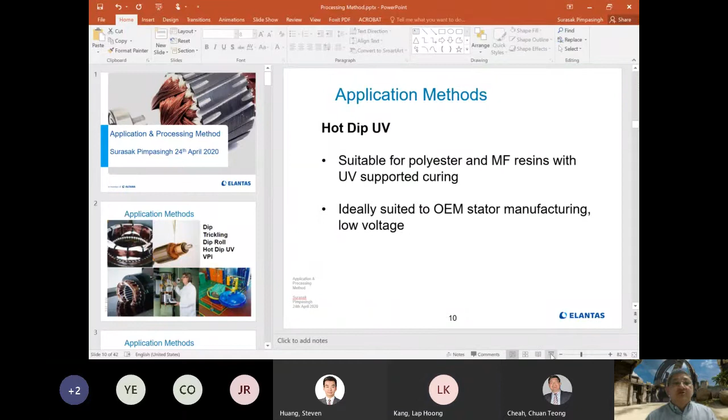Not talking right now, would you mind muting your speaker, please? Okay.

So to have the, looks like Koji cannot connect. Someone may help him, please.

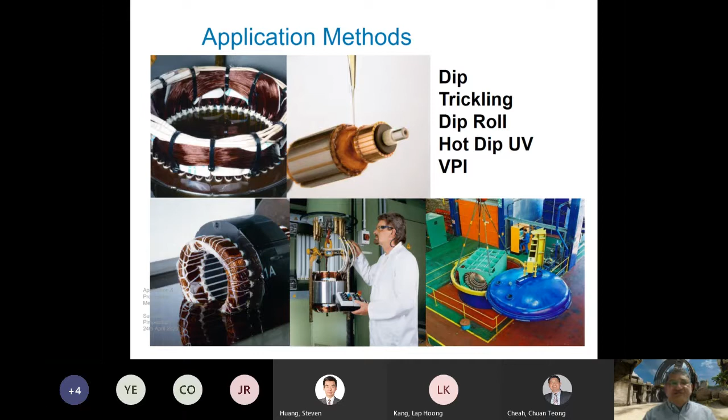The application method of the EL, we can see there are two things that we can separate. One is using the ambient pressure, and the other one is using the vacuum or the pressure. So at first, I would like to talk about the dip and bake, and this is for the transformer and motor. So both.

It is suitable for one component, and sometimes we also see two component as well. For example, CT, you may have a lot of experience on this, most of the unsaturated polyester is non-catalyzed. So we will have to catalyze before putting it in the system. So it's used for both one component and two component. So it suits the repair market and the OEM, as we always see.

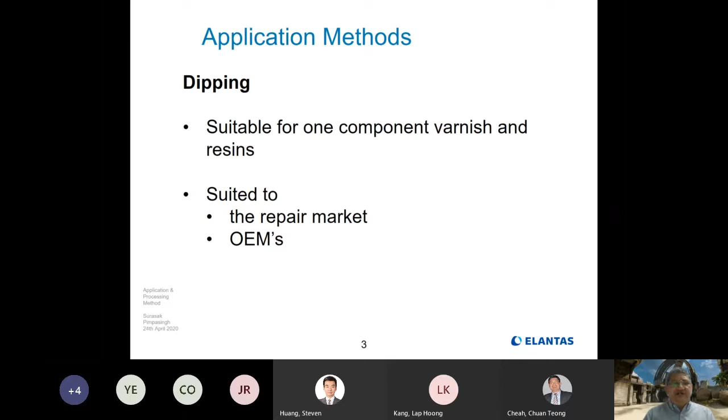So the most important thing when we talk about the dip and bake is the atmospheric pressure. We do not do anything pressurized or vacuum. Otherwise, we would call it something else. So this is what we call dip and bake. The resin is also under ambient temperature and ambient pressure.

The other thing, I think you always see the dip and bake a lot when you go to your customer. For example, for the electric motor repair or the OEM, you can see it a lot. You see the tank filled with resin, and then dip it, or we have something like what we call the inline process, and so on and so forth.

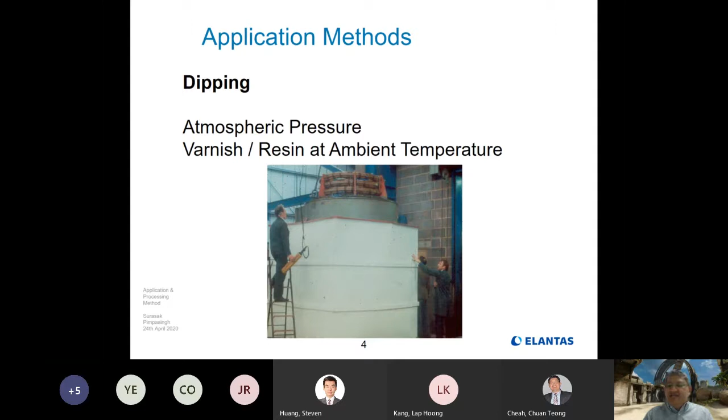So it is very important that you can imagine and follow what I'm talking about. This is more like an explanation and a workshop. So whenever you have a question, please do not hesitate to speak it out. As I always say, the most stupid question is the question that you have and do not speak out. So just ask and I'll answer. If I cannot answer, I will find the answer for you.

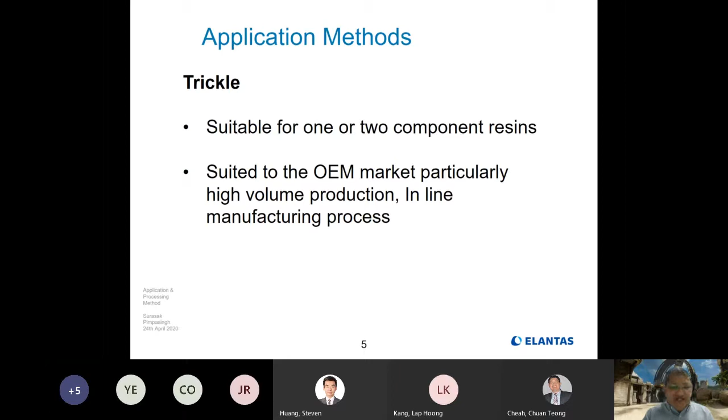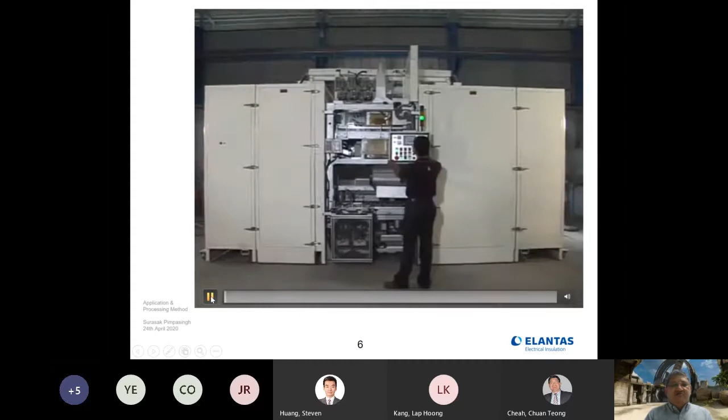So I have a short video that you can see. This is the method of trickle impregnation. Let me know if you cannot see or hear it. First things first, we put what we call a marker, and then pre-weigh first. Weigh before.

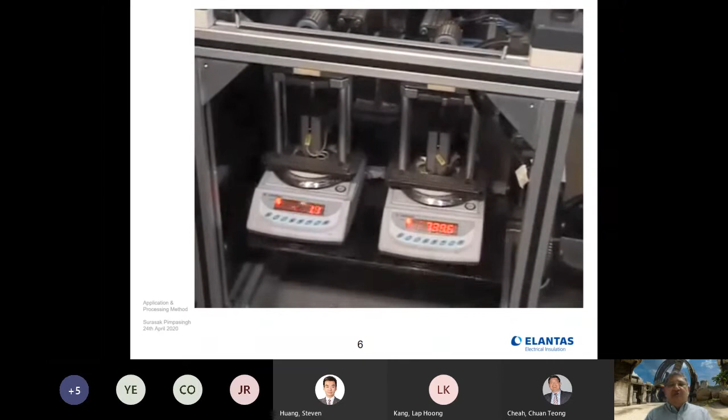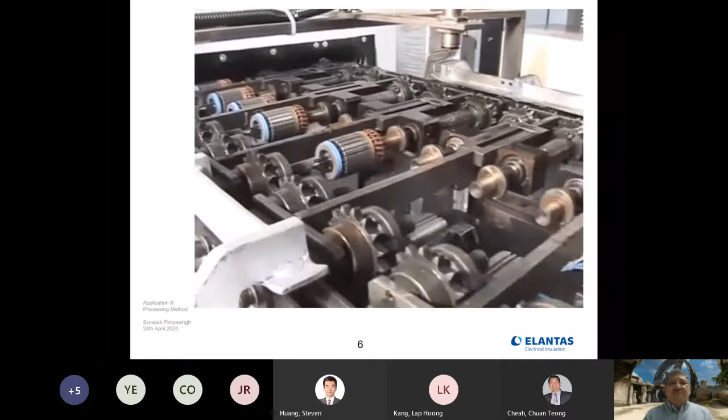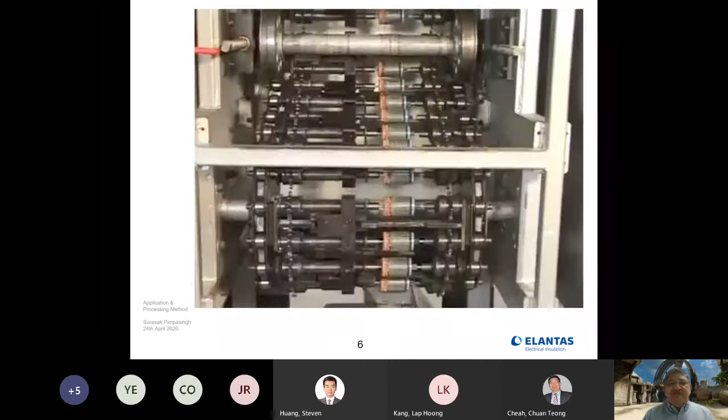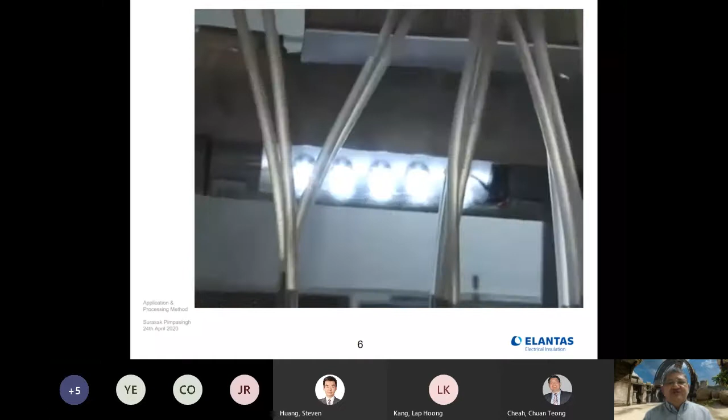This slide system, and then to preheat. After the video, I will tell you why we have to preheat. Some of you know already why. So this is the pump that pumps the resin at the amount that they want.

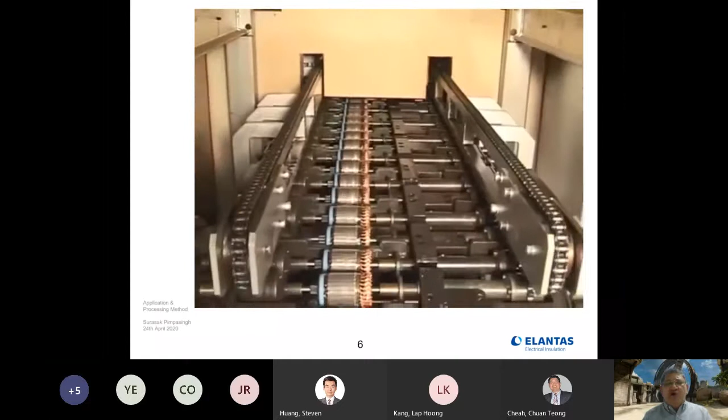This is the trickle zone, and after the trickle zone, it's sent to the scaling point. And after that, they will cool down. They will take it off and then measure the weight once again. So this gives you some idea of what we call a trickle impregnation system.

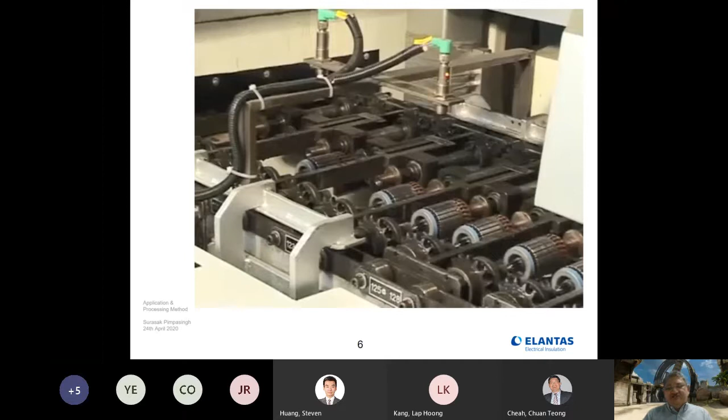This is the armature of the motor starter. It might not be familiar to you because they are using big wires and so on, because this has to generate high torque at the beginning. So it is the motor starter. This is something that we always see, and we have seen it a lot.

This is the power tools. So we trickle the resin. Usually we will trickle it at the ambient temperature. Only in some very cold areas will we elevate the temperature of the resin, because the more we elevate the temperature of the resin, the shorter the pot life.

I say pot life, not shelf life, because most of these things will be two-part, and when you put two parts together, the pot life is the point where the viscosity gets up to double. So if someone can remember the Dobeckan 1080, 120 A and B, the viscosity will be around 150 centipoise.

Not more than that. So whenever the viscosity gets up to 280 to 300 centipoise, that's the point we call the pot life. That's the time that you should not use the resin anymore, because it has already started to have the free radical or cross-link.

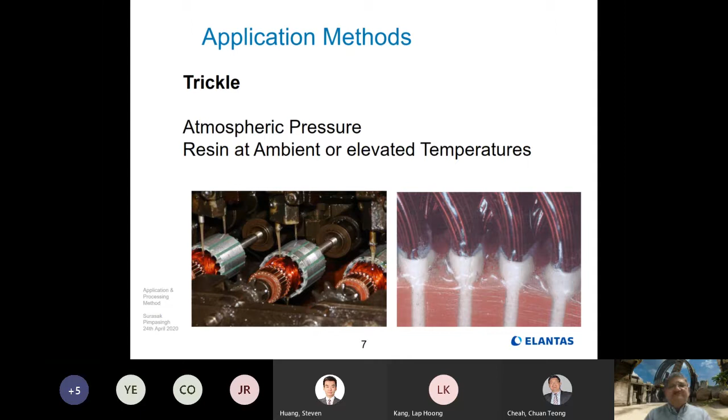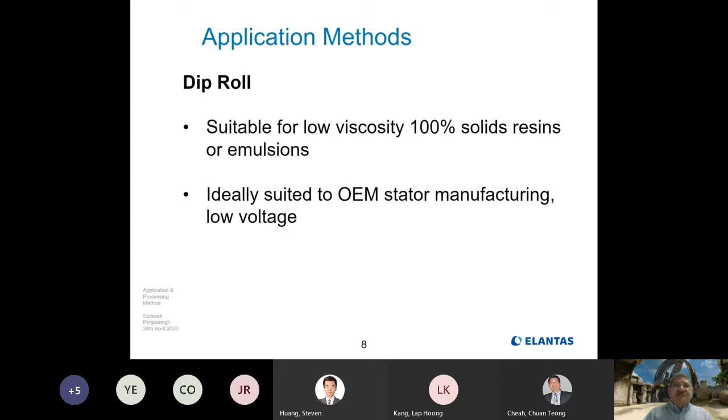So the other one that is used a lot in stator manufacturing or rotor manufacturing will be the dip roll. We have seen this a lot. Our very easy example is Mirari Motori. So HH 11,000, this is a very good sample of the dip roll. So it is very important for you guys to understand that.

So the dip roll can be at ambient temperature or elevated, or preheat the thing. This thing, the white one that you see, is the emulsion. It's a 59 series emulsion. So this is also part of the dip roll. The other things,

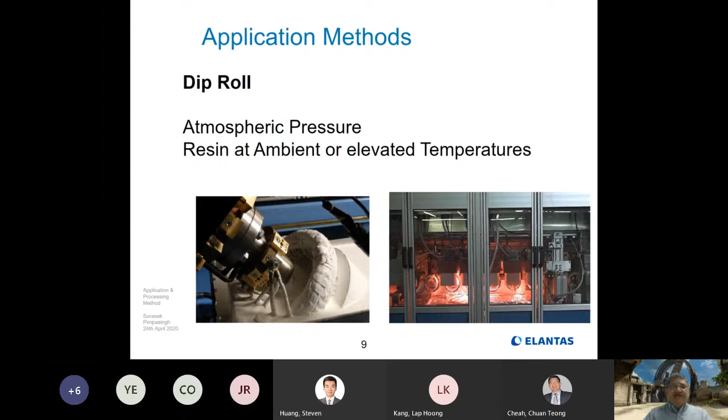the other method that we have not seen that much in this area, because the monomer-free resin has very high viscosity. Jinda and I went to Solar Palau in Thailand, and they spec the monomer-free resin in Spain, and they want to move the production line here. So it is the hot dip. When you say hot dip, it means it's really hot. So they preheat the part to 160 degrees and then put it in the MF resin, monomer-free resin.

You cannot do this to our normal unsaturated polyester or the epoxy, because the heat in your part will transfer to your resin, and it will shorten the shelf life a lot. But this will not happen in the monomer-free resin. So Solar Palau is a very good example of this. So this is a very important thing to understand.

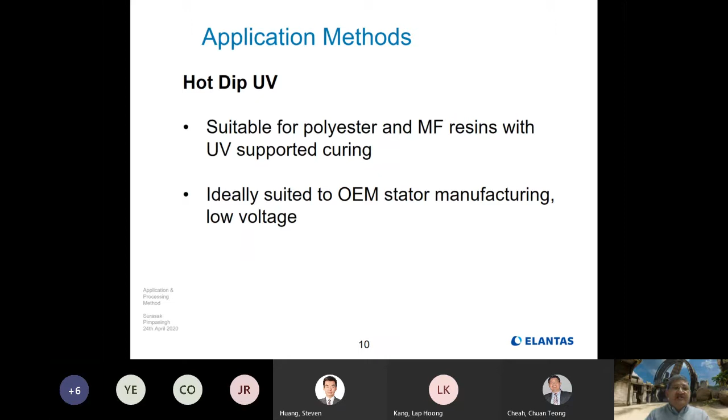So like this, we have the hot dip and then UV. The UV will help to cure and close the surface, and then after that we will fully cure, just like someone using step curing. For example, we have seen motor or transformer processes with our epoxy, and they want to gel it first. So they put it in at 120 or 130 degrees Celsius for 2-3 hours so that it gels first, and then after that cure at the temperature that we want. That's the two-step curing.

Very similar technique to the UV. So you want to close the surface first. This can be good only for solventless resin, because if you apply UV to solvent resin, it will close the surface, and then after that when you cure, the cross-linking mechanism of the solvent varnish is that the solvent evaporates, and then the crosslink happens. Think about it: if your surface is already closed and the solvent tries to get out, what you will see is a lot of blisters and a lot of bubbles.

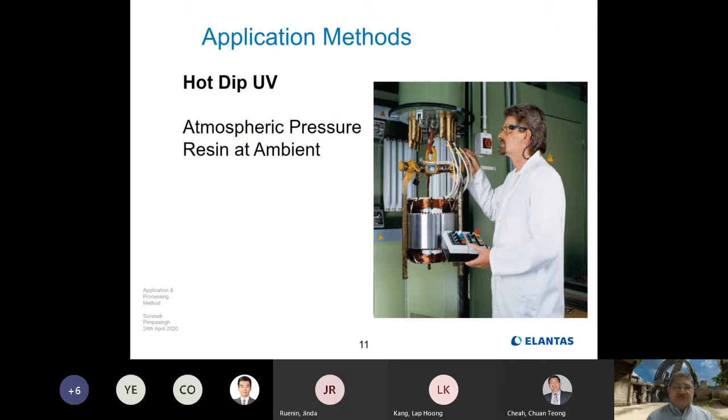Anyone with more questions about this, please speak up, because if not, I will go to the VPI, or vacuum pressure impregnation system. There's a lot of things to cover in that. At the end of the presentation, you can also ask questions once again. Okay, looks like no. Okay, I'll go.

The vacuum pressure impregnation system, or vacuum impregnation system, is suitable for high or low viscosity, but the most important thing is 100% solid resin, what we call solventless resin, unsaturated polyester without solvent. Monomer is okay, and it is used in both manufacturing and repair of rotating electrical machines, high and low voltage, and also traction motor repair as well.

As you can see, Cheah and I and Faris worked together with Mr. Bong in Mentech to charge the tank with the 477, and Jinda and I worked together to charge the tank with the 477 resin in, I cannot remember, Daniel Lee in Rayong.

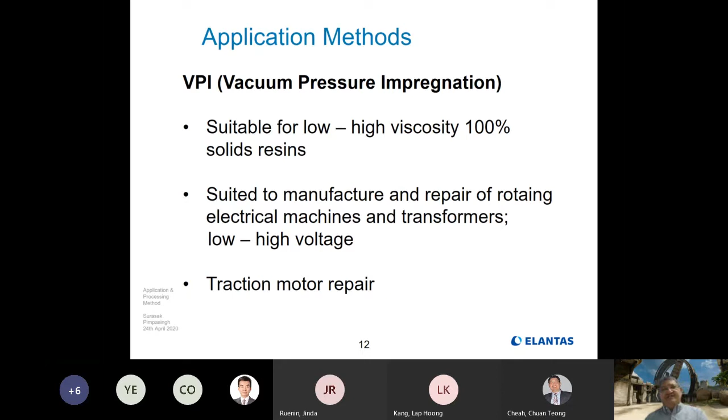So it is very important for everyone to understand the technique behind the VPI first. Then you can know why you have to have low viscosity, why you have to have thixotropy, why you have this property, and so on. So let me start with the vacuum and pressure impregnation system. I have a short video that shows why and how we have to use the VPI.

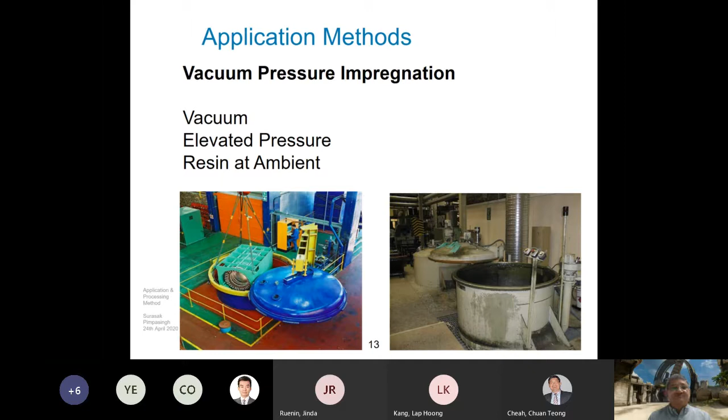Of course, this is not by Elantas. I did some research on YouTube, and this is very good for us. But make sure that you use it internally, because maybe it's registered and patented for someone and confidential. I don't know, but if it's on YouTube, I would say it's okay to use, but make sure that you use it in the right way. This is the short video I will show you.

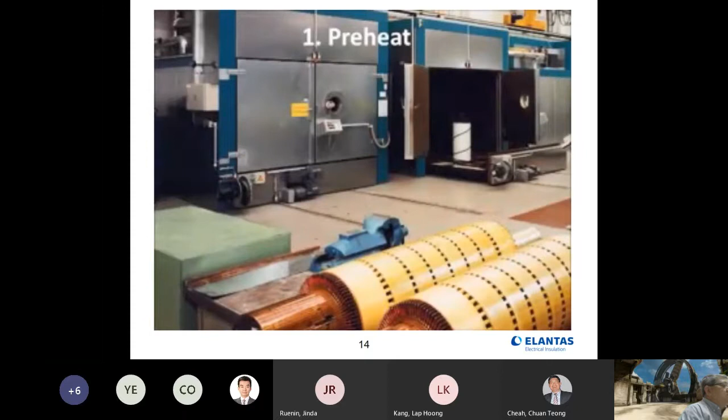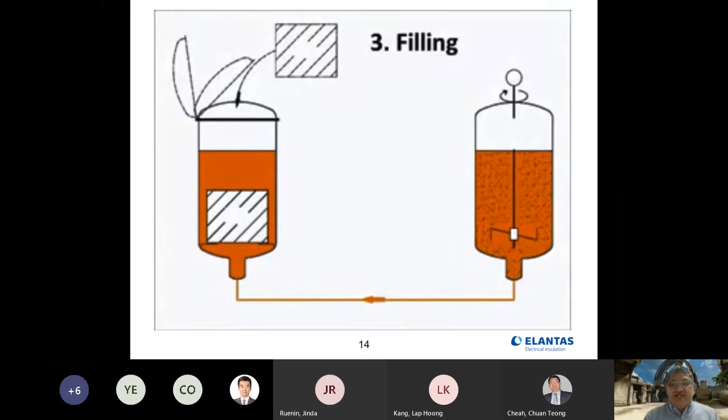Yeah, after this I will explain you in detail, much more than this. So first thing first.

I think everyone knows the VPI material, which what we have a lot, starting from 477, 478, 468, 577, 578, blah blah blah. You can talk about that.

Also some of our customers want to do the VPI for the solvent material, I mean solvent varnish. It is very common in some countries, but not in Thailand, because we try to explain to them that the first thing that happens when you put the vacuum on the material, you will strip off the solvent inside.

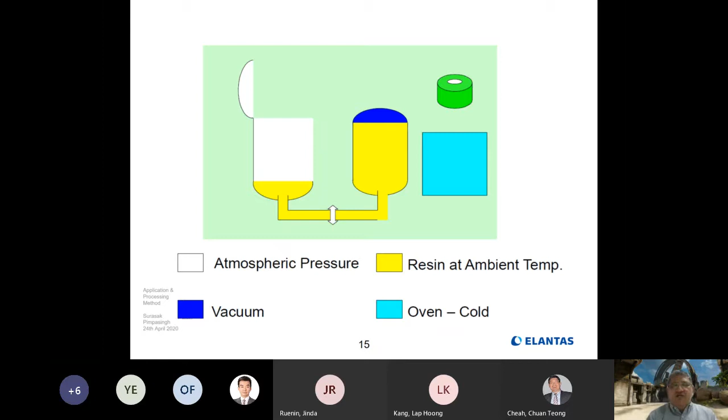So at first the part will be in normal temperature, and then after that you put the part in the process tank. This part we also have two technologies: one is to preheat the part first, two is not to preheat the part. So both of that yield different results.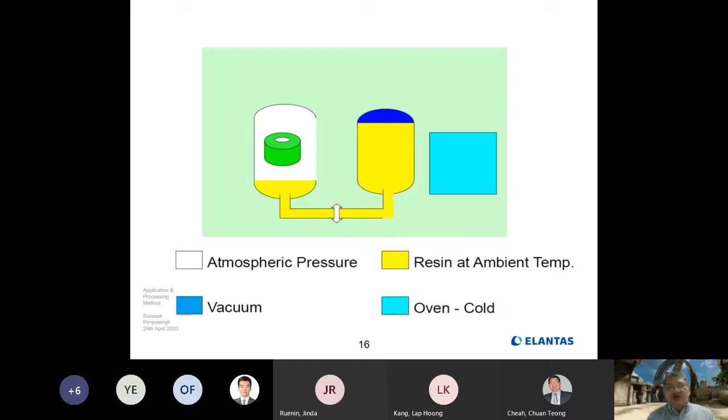Due to the fact that in our area there's a lot of moisture and so on, I would strongly recommend to preheat the part before processing the VPI. And then after that we pull the vacuum. Vacuum will help to eliminate the moisture and some other contamination and so on and so forth.

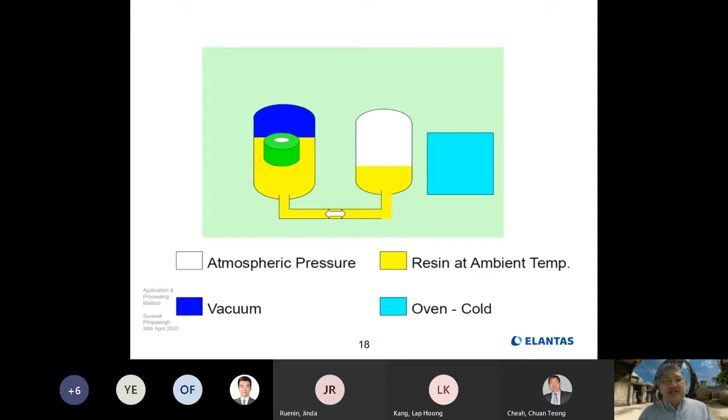After that you open the valve, so the material from the storage tank will come underneath and then get up to the process tank and cover the part. Then after that you break the vacuum. At this point the process tank is under vacuum, and then you put the positive pressure on.

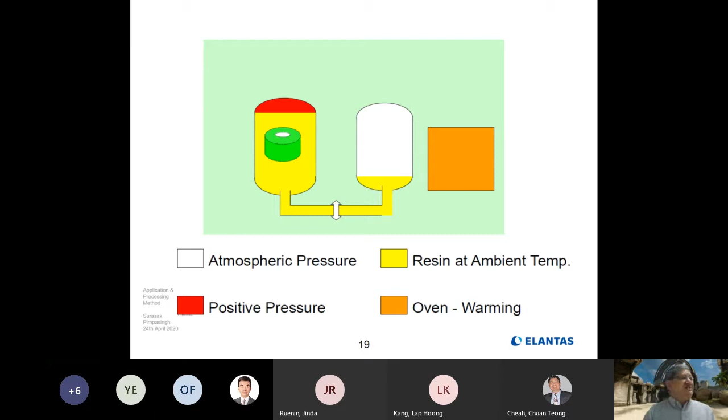The level of vacuum that we always use is 5 millimeters of mercury, or 5 torr. And the positive pressure that I always use is 90 psi. All of this has been sent to you in the process specification PS 43F. This is for the form wound coil. We also have random wound coil, but random wound coil is very easy to treat, so I'm not putting it in. If anyone is interested, I can send it to all of you as well.

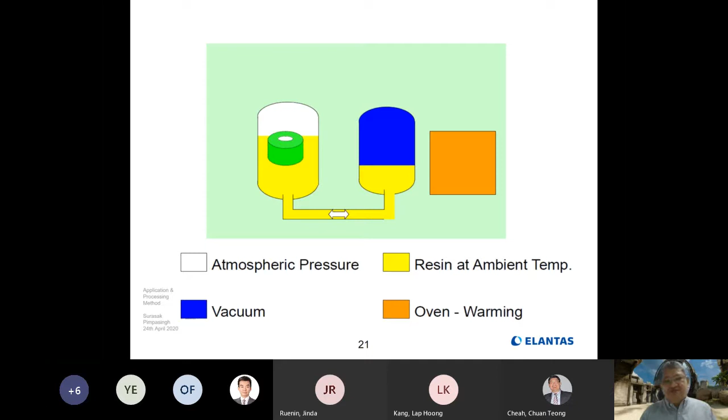Then after that you pull the vacuum on the storage side, ready for the material to pull back to the storage side. At this time you pre-warm the oven, and then the resin transfers back to the storage side. After the resin transfers back, you put the lid of the process tank up, and then put the part in the oven.

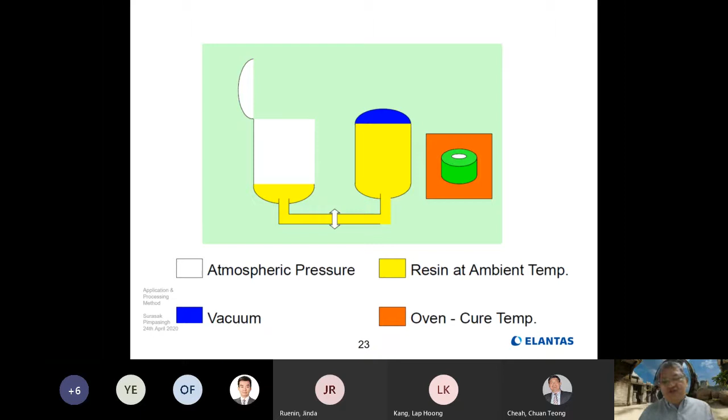This is very systematic. We always do the VPI in the daytime and then put it in the oven at nighttime for overnight. That is what we always do. So this is the form wound coil that you can see.

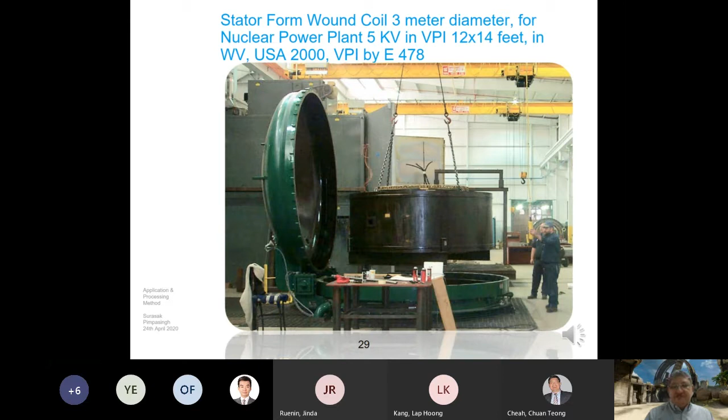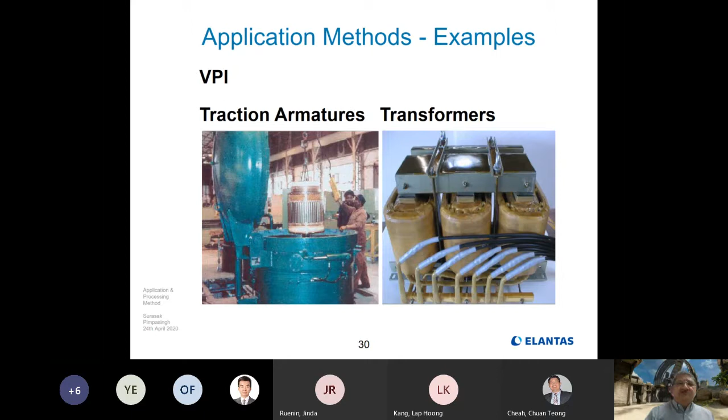This is just a traction armature and also the transformer. When we say VPI, it is not always for the rotating machine. VPI is also suitable for the transformer as well.

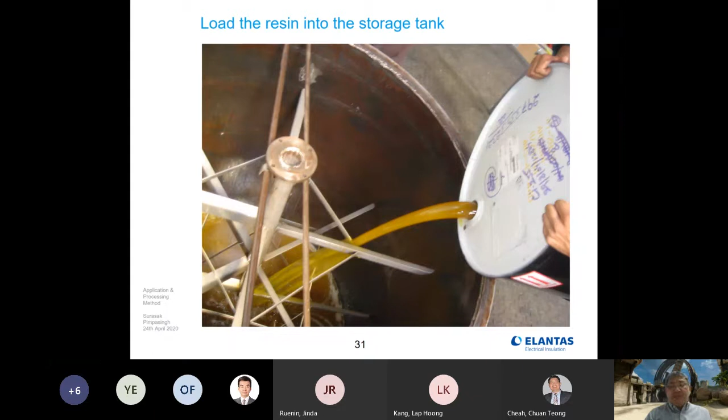This is ACLA in the year 2003. I was there with Abai Kunte, and this is Kotsons. We did the project together with DuPont, and our product at that time, from EPDG, Elantas PDG, the PD George, the product is 468-2FXT.

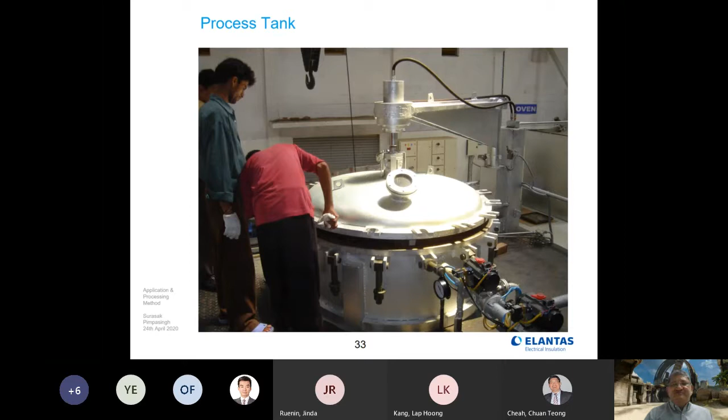So we put this coil, and we VPI the coil. This is the VPI machine built by themselves under our recommendation. So this is the coil. After VPI, you pull it out after the process, put it in the oven, and then you measure the temperature at each point, inside, outside, and middle, and so on and so forth.

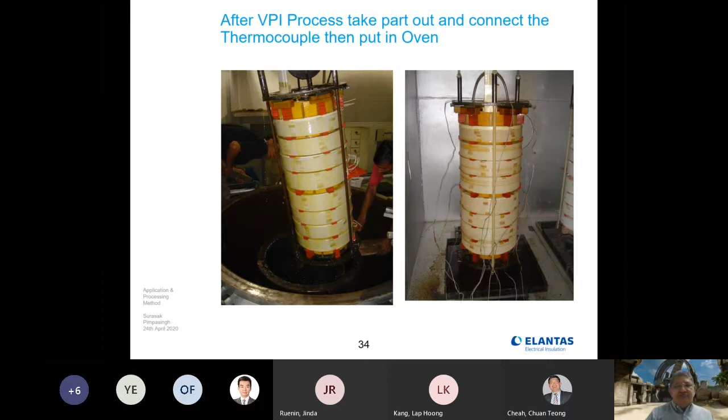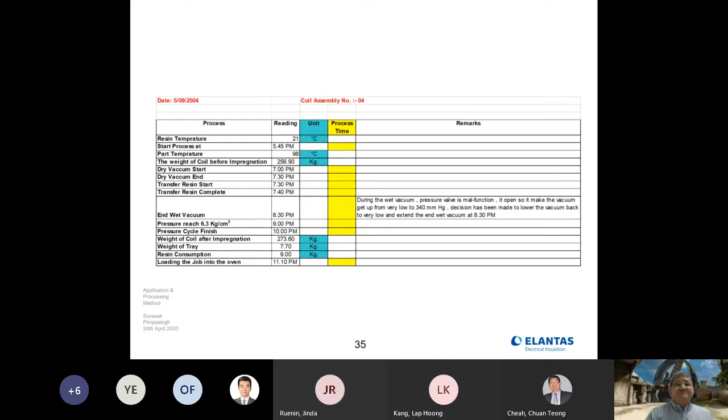So this is something that Koji Okawa and JT will be very familiar with, because I modified it a little bit to use in the Kotsons. So this is the temperature.

So you can see that the part temperature is not always the same at every point. So this is what you have to be careful about.

And when we talk about the temperature, or the duration time of the curing, let's start from the time that the part temperature reaches that temperature. So not the time in the oven.

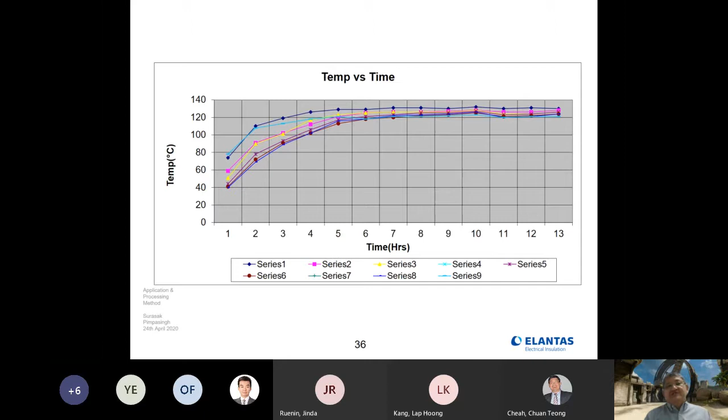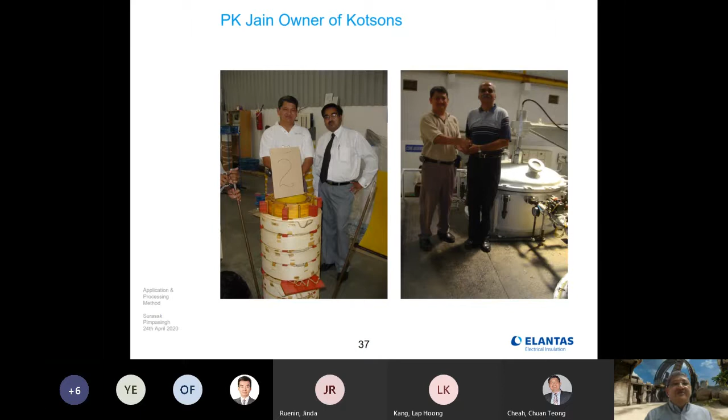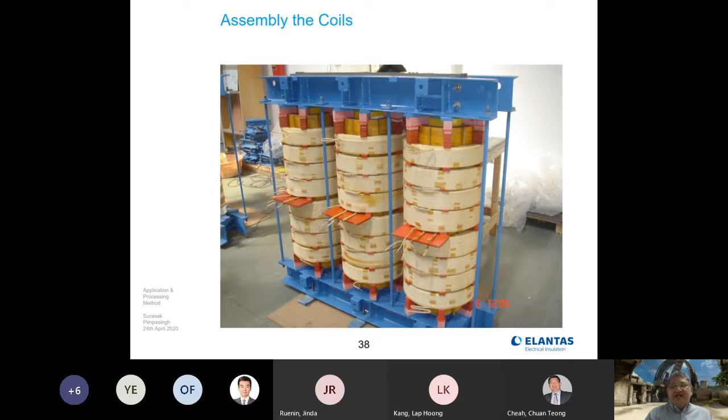So this is after its assembly, and the most important thing is you need to be careful about the impregnation level, and also whether it is fully cured.

So you took one coil out, then out from the Kotsons to EPDG, and then you cut it, and then you scratch some part and see it by the electron microscope.

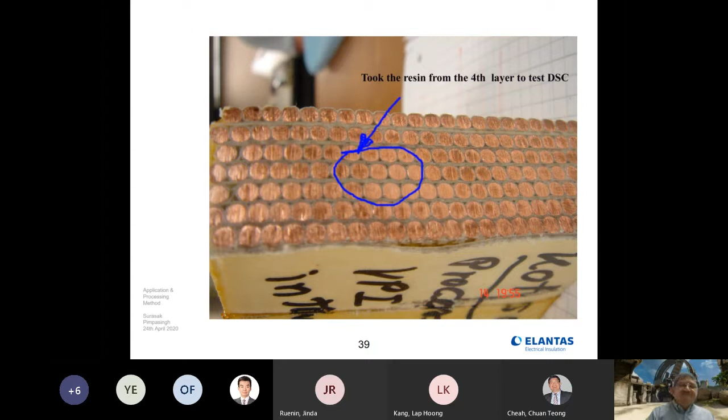You will see that some part is mostly filling the gap with our 468. So this is running the DSC to make sure that it is fully cured.